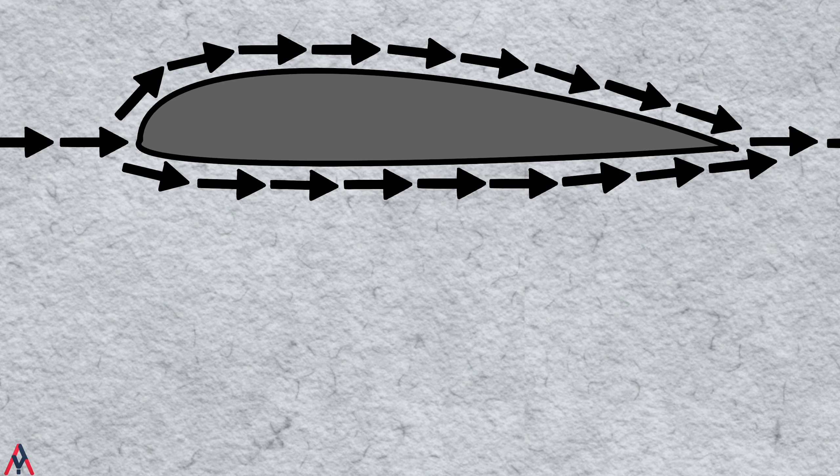It is about weaponizing fluid dynamics, manipulating wave interference, and hiding vacuum chambers just inches beneath the players' cleats. Here's how you build a fortress against nature. Let's start with the most mathematically infuriating problem: thermodynamics.

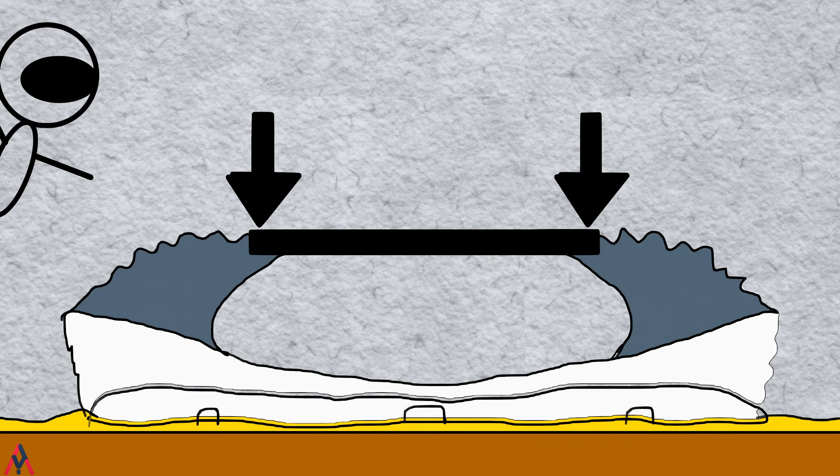If you build a stadium in a desert environment, like the incredible Al-Janoub Stadium in Qatar, you can't just put a solid roof on it. A permanent transparent dome would trap the sun's radiation, completely turning the interior into a greenhouse of death. You have to leave the roof open, or at least have a retractable one. But if you leave the roof open, how on earth do you air condition the sky?

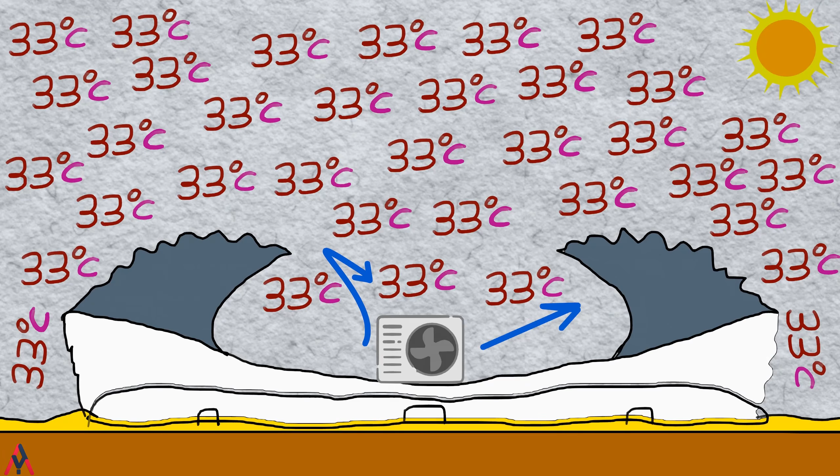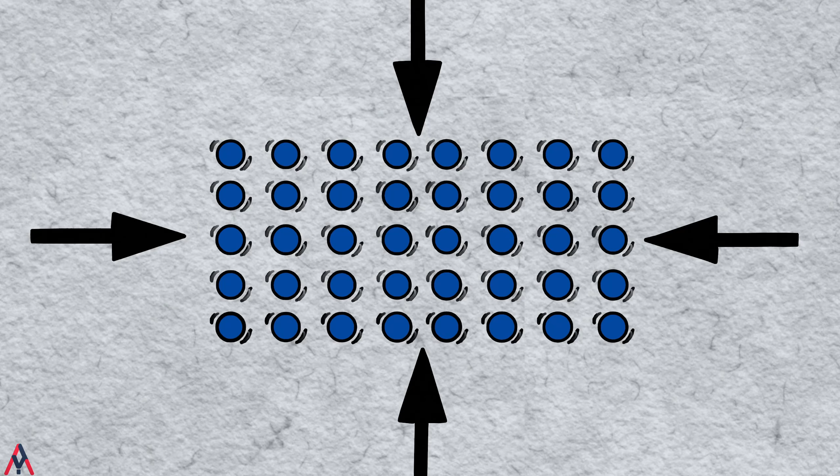If you pump cold air into an open bowl, basic physics suggests it would just diffuse, drift upward, and get swept away by the atmosphere. Unless you stop trying to cool the air and start treating the stadium like an empty swimming pool. At a molecular level, cold air is sluggish. The molecules huddle closer together, making a volume of cold air significantly denser and heavier than a volume of hot air, whose molecules are highly energetic and bouncing apart.

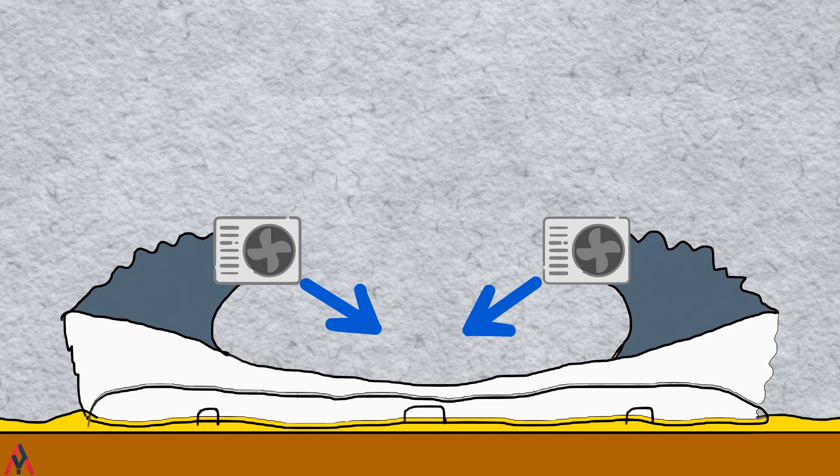Instead of putting giant jet engine style AC units in the roof and blasting air downward, engineers completely invert the system. They hide tens of thousands of micro nozzles directly beneath the spectators' seats, under the stairs, and lining the perimeter of the pitch. These nozzles don't blast air. They effectively bleed heavily chilled air at an incredibly low velocity.

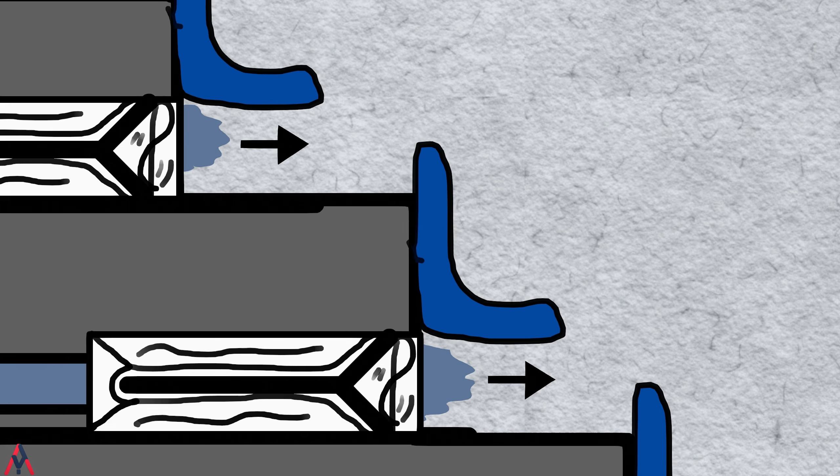Because this artificially chilled air is so heavy, it immediately sinks, slowly filling the pool of the stadium with a dense microclimate. Within a few hours, the entire seating bowl and the playing surface are submerged in a literal lake of cold air. When the blistering hot atmospheric air above the stadium tries to enter, it finds itself facing the boundary layer of this dense cold air and just bounces off. And just like that, you have successfully air-conditioned the outdoors.

But there is a catch. That bubble of perfect dense air is incredibly fragile. What happens when a violent storm rolls in? If you have ever played a game on a standard grass field during a downpour, you know it can take less than 10 minutes for it to turn into a muddy, unplayable swamp. Water pools, dirt turns to clay, and traction drops to zero.

Yet, during a torrential downpour at Anfield or Wembley Stadium, the grass remains a perfect carpet. That is because the pitch isn't dirt, but a hyper-engineered multi-layered sandwich. It starts with a hybrid matrix. Using massive laser-guided sewing machines, engineers inject millions of synthetic polyethylene fibers exactly 20 centimeters deep into the ground, spaced just millimeters apart. When the natural grass grows, its roots physically intertwine with this plastic mesh.

This locks the soil in place so tightly that a 100-kilogram athlete wearing metal cleats can plant their foot at a dead sprint without ripping up a massive divot. But the real magic is beneath the roots. The soil is a meticulously graded silica sand root zone sitting on top of a gravel blanket, and hiding beneath that gravel is a massive network of pipes hooked up to industrial vacuum pumps. This is an active subsurface aeration system, commonly known as a sub-air system.

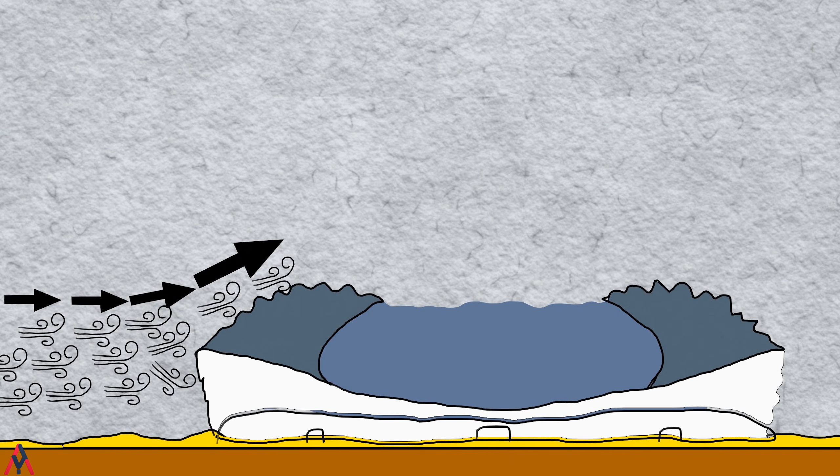When severe winds hit the curved exterior of the stadium, the air is forced to accelerate as it travels up the curvature of the facade. As the air's velocity increases, its pressure drops. This creates a massive low-pressure zone directly above the opening of the roof. The sheer speed and trajectory of the wind essentially vault it right over the hole in the center. The stadium throws an invisible protective blanket of fast-moving air over the open bowl.

So, we have defeated the sun, we have vacuumed the rain, and we have deflected the wind. But the most destructive force a stadium faces doesn't come from the sky, it comes from the fans. Imagine this: a 90th-minute game-winning goal, 40 to 60,000 people erupt, jumping out of their seats and stomping on the concrete at the exact same time. 60,000 adult humans jumping simultaneously. That is no small force.

This is a kinetic event so massive that it creates a localized earthquake, and it introduces the most terrifying physics problem in civil engineering: resonant frequency. You see, every physical object in the universe, from a wine glass to a suspension bridge, has a natural frequency it likes to vibrate at, dictated by its mass and stiffness. Think of pushing someone on a swing. If you push them at random times, nothing happens. But if you push them at the exact right moment of their arc, they swing higher and higher. That is constructive wave interference.

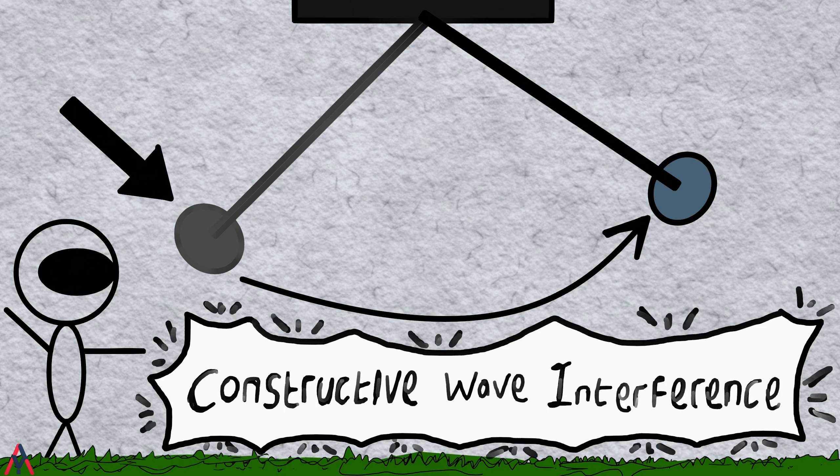If the frequency of a crowd jumping, which usually averages around 2 to 3 Hz, perfectly matches the natural resonance frequency of the stadium's concrete skeleton, the vibrations compound, the kinetic energy stacks. Left unchecked, the structure would literally vibrate itself to pieces. To prevent a catastrophic collapse, engineers borrow a trick from skyscraper design. Modern arenas like the colossal 17,500-seat South Stand at the Tottenham Stadium deploy tuned mass dampers and base isolators.

The stadium is not built to be rigid, it is built to be a massive suspension system. When the crowd jumps down, imparting millions of joules of kinetic energy into the floor, the stadium skeleton slightly flexes. In response, those massive tuned dampers physically shift up. They move exactly out of phase with the crowd. This creates destructive interference. The upward mechanical wave of the damper perfectly cancels out the downward mechanical wave of the jumping humans. The kinetic energy is absorbed, converted into a tiny amount of heat within the hydraulics, and safely dissipated. The stadium breathes with the crowd, surviving an earthquake entirely of our own making.

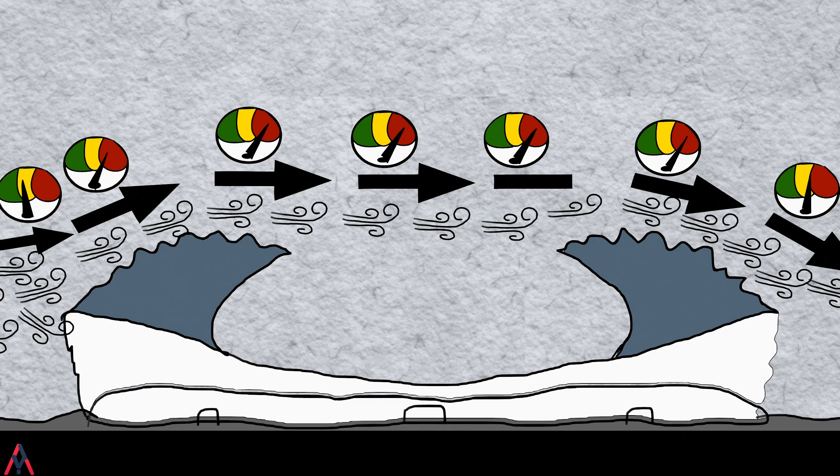When you pull back and look at the whole picture, the true marvel isn't just that these individual systems exist, it is that they are entirely, beautifully interdependent. The aerodynamic airfoil of the roof stops the wind. By stopping the wind, the heavy lake of cold air is allowed to settle in the bowl. That dense cold air cools the fans, preventing heat stroke. Those comfortable fans inevitably jump and create seismic chaos, which is safely absorbed by the flexing hydraulic skeleton.

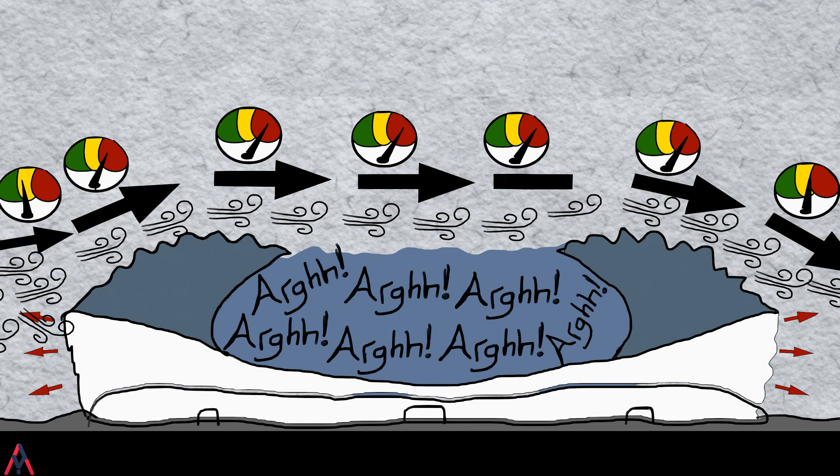And beneath it all, a vacuum matrix quietly pulls a thunderstorm out of the grass so the game never has to stop. A modern stadium is a singular, living machine, engineered to perfectly isolate 60,000 people from the whims of nature and themselves. So, the next time you are frustrated that your favorite team lost, at least you can appreciate the absolute engineering masterpiece they lost inside of.